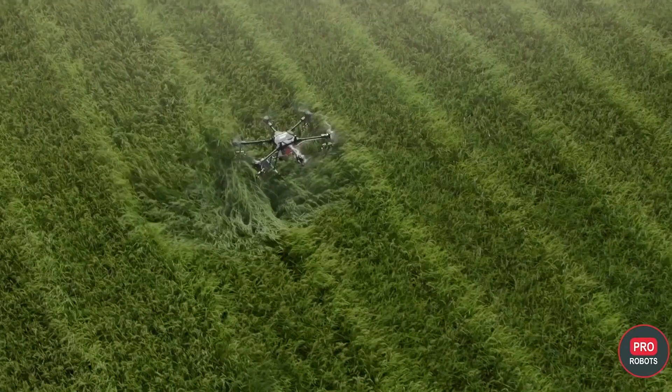There are now manifold applications for drones, and new ones are being added every day. The list of possible applications, whether it be agricultural, civil defense, energy, construction, real estate, logistics, media production, or security tasks, as you can see, it's long. The use of drone technology will continue to expand due to its wide range of possible applications.

That's the simple reason why farmers in particular are so keen on the use of drones for their work. From a bird's eye view, you can see many things better than from the ground.

Multicopters and drones can be used in a variety of ways in agriculture, forestry, and viticulture. Precision farming is the key word. Multispectral cameras and color filters can be used to determine the health of crops.

These filters allow only certain color ranges, called multispectral, or only individual wavelengths, called hyperspectral, of the leaf reflection to pass. Using GPS-based flight plans, several hectares can be flown over autonomously within just a few minutes.

These results enable precise management, which can either target or save resources such as water, fertilizer, and pesticides.

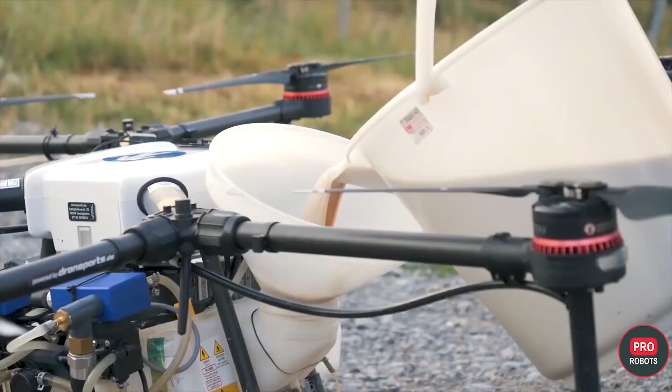One application is vineyards, which are usually difficult to reach. For example, a winemaker can take targeted and early action on the vineyard without losing harvest or having to treat an entire vineyard. Another possible effect is that soil pollution decreases because the soils are protected.

Since no soil compaction is caused by heavy equipment, another positive effect, not to be neglected, is that there are fewer emissions due to the low flight altitude and efficient spray procedure. All of this leads to economical farming.

More and more authorities and organizations in the rescue and safety sector rely on the use of drones. With specially equipped thermal imaging cameras, they are actively helping to fight fires and conduct search and rescue operations from the air.

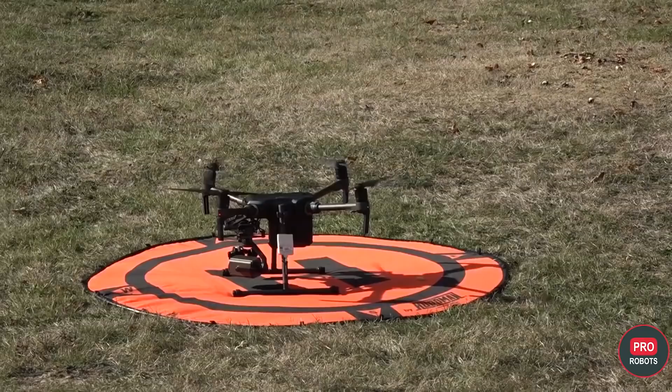Drones already offer a wide range of applications in civil protection as well, including the acquisition of aerial images in an operational situation, the use of infrared imaging cameras or special measuring devices, the transportation of equipment, medicine, or other aid, as well as the extension of radio links and documentation.

As technology advances, more and more operational areas are conceivable for drones that can contribute to saving human lives as well as significant material assets.

Today, unmanned aerial systems are already being used successfully in areas like search and rescue operations in mountain areas, for people in inaccessible terrain who previously had to be searched for on foot by mountain rescuers for hours.

They can now be located in as little as 10 to 20 minutes with the use of aerial operations.

Drones can be useful to law enforcement as well, especially during emergencies, and cities across the US have found creative ways to use these drones.

At present, drones are used for a variety of reasons, ranging from hostage negotiations to bomb investigations, criminal surveillance, and crime scene analysis.

In the present coronavirus pandemic, some countries' police agencies are using drones to check in on residents who have tested positive for COVID-19. In India, police are using drones to track large gatherings and monitor narrow roads that police cars can't normally fit into.

In France, health warnings are blared through drones flying over deserted beaches.

However, fire departments are also calling for drones to be used as firefighting tools, with the ability to transport heavy loads. The possibility of transporting rescue workers on or in a drone is also being examined.

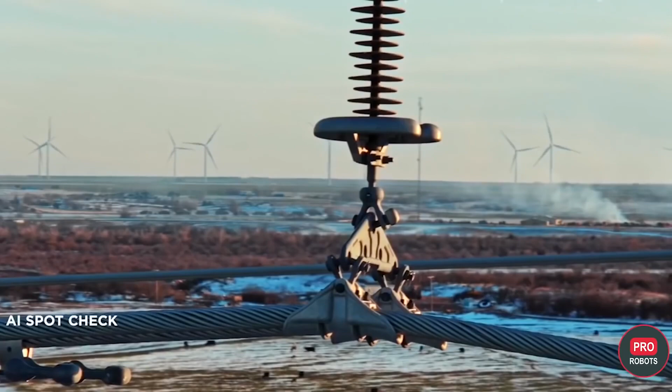A major application for aerial robots is maintenance. In both reactive maintenance, which has become rare, and preventative and predictive maintenance, drones help provide accurate data which can support condition monitoring, speed up repair processes, and minimize downtime.

Drones are helping engineering teams inspect and maintain wind and solar farms. Through machine learning, drones can autonomously recognize patterns and regularities via cameras and sensors.

Based on these findings, valuable recommendations for action can be provided, for example, which are only made possible by the drone's different perspective. But not only automatic surveillance can be supported by a drone.

From the air, the condition of wind turbines, satellite dishes, or the location of containers in the cargo port can be checked. Aerial reconnaissance by flying objects can save a lot of time for employees, who instead of looking themselves can let the drone fly and have the data images right away.

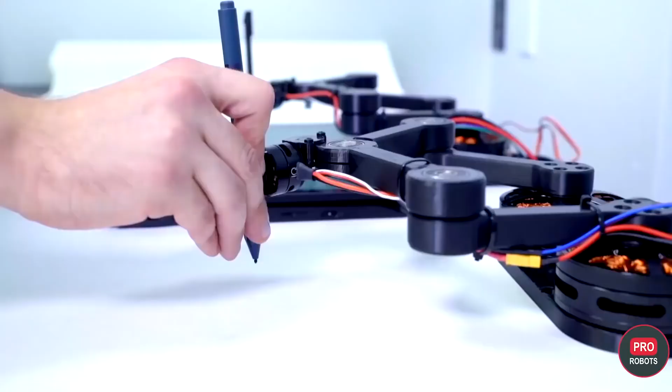Open-air rooftop systems that are difficult to access can then be monitored from the air. To ensure the best drones can withstand the rigors of industrial use, the appropriate components must be in place, however.

IQ technology allows users to gather important motor data and telemetry for preventative maintenance. Imagine being unable to monitor the health of your vehicle, like a car without a check engine light. In the drone market, motor and control technology is still hobby grade, and existing solutions don't provide easy access to motor data. Hence, IQ Motion Control built a motor controller that can report both standard and advanced telemetry.

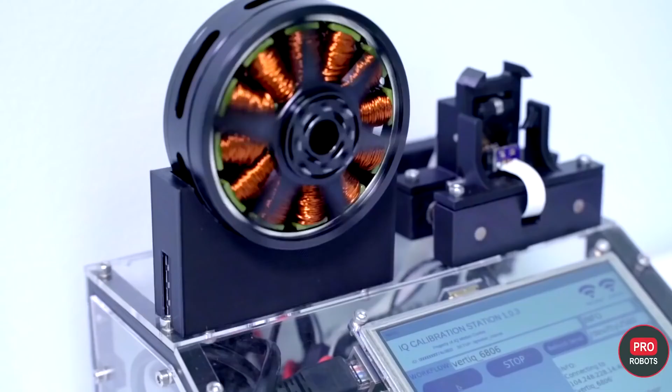Drone makers will be able to significantly improve maneuverability of their vehicle. With IQ's closed-loop motor control technology, IQ components users observe better efficiency, improved power and torque, improved cornering and handling, and can stabilize and brake up to 4 times faster. IQ Motion Control software further enhances motor performance, and the IQ Motion Controller also reports a wide range of motor parameters that can be used for preventative maintenance.

With IQ's high torque and high performance UAVs and robotics devices, users will be able to exercise precise, smooth control over these compact, lightweight motor modules, enabling robotic arms, legs, and much more. Reliability is a big deal on any robotics device. The combination of IQ's high-end motor performance and extensive feedback allows drone makers to build the most reliable vehicle for any purpose.

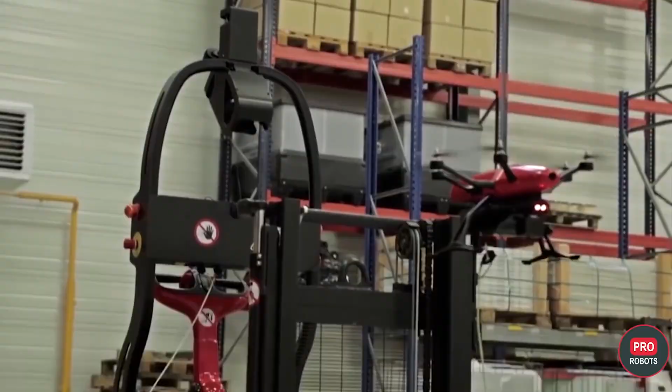In the future, drones are expected to be increasingly used for internal and external goods transportation. Due to their agile flight characteristics, drones can easily fly not only outside but also inside buildings. In intralogistics, they are used in warehouses or high bay warehouses for many kinds of inventory control, performing tasks such as inventory autonomously and under software control. Until now, this has required many employees during normal operating hours.

But with a quadcopter, this can be done at night and without any personnel, especially in high bay warehouses. This reduces the risk of accidents for employees, and permanent monitoring of stock levels also improves inventory accuracy throughout the year. To ensure power supply and location in the hall, the drone is coupled with an automatic high-lift truck.

Another example are doks. innovation from Germany offers a complete solution for automated inventory and inventory management in pallet racks in the warehouse area. The solution enables precise location and fully automated recording of the entire warehouse.

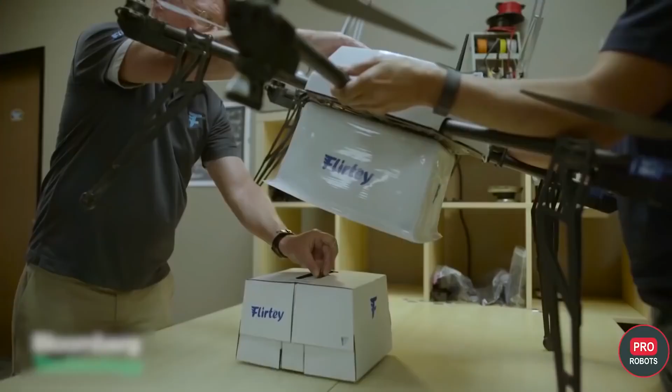Receiving and sending packages by a delivery drone was made possible thanks to a specially developed packing station on which the drone could land. Reps for DHL say it's the first parcel service provider in the world to succeed in integrating a parcel copter directly into its logistics process.

A trailer detection and port inspection solution is also possible with drones. By performing digital inspections at the port, operators get better, simpler, faster, and well-documented data that supports their reporting and further business development. Smart mapping of port infrastructure and harbors helps simplify daily operations such as terrain management. In addition, modern 3D maps allow volume inspections of drone equipment to not only detect but also capture the volume of stored goods and materials on the quays, such as sand, gravel piles, etc., all from the air.

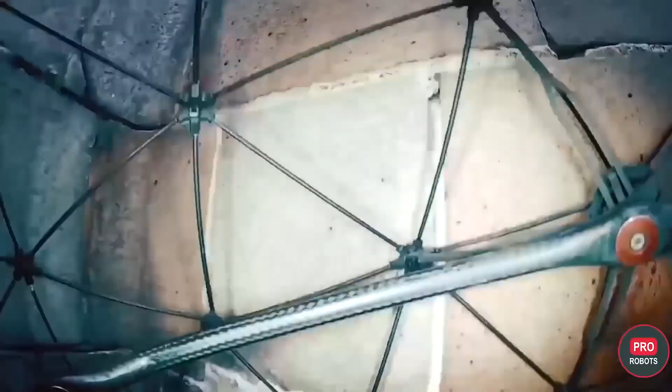The use on plants and in the chemical industry requires the highest concentration and does not allow any errors. One of the most important applications is the inspection of high flares.

Drones can also be put to wonderful use in technical maintenance, particularly in areas of large plants that are difficult to access or located at high altitudes, and can be monitored cost-effectively in this way. According to drone manufacturer Multi-Rotor, energy suppliers and plant engineers are already relying on these flying detectives.

The Italian company Alv Group uses the Aibot X6 drone to obtain high-precision data for bridge inspections. This allows more than 4,000 structures to be surveyed, inspected, and maintained each year.

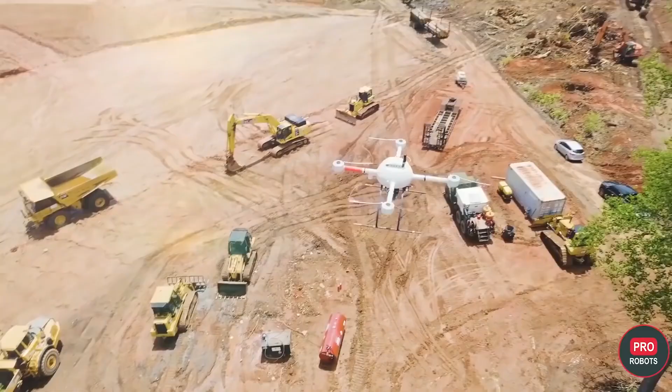Another possible use of drones is the mapping of land and geography work. The Micro Drones MD Mapper 1000DG system is a fully integrated aerial photogrammetry and mapping solution. Featuring the Applanix APX-15, the system allows surveyors to achieve professional results with fewer or no ground control points. Micro Drones offers a complete package consisting of the drone, sensors, hardware, software, workflow, training, and support.

In this video, you'll see the system in action. Topography data is captured efficiently on-site to produce helpful models for decision-making.

Entertainment drones are also used for entertainment purposes. For example, more than 1,300 drones simultaneously flew into the night sky over the Chinese city of Xi'an. They made a 13-minute light show and entered the Guinness Book of World Records. Enjoy this magnificent show.

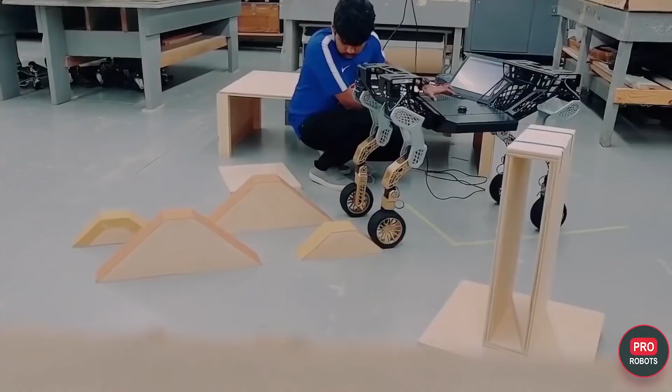Hyundai unveiled its new Tiger robot transformer. The fully autonomous modular robot can move on wheels, staggered feet, and work in conjunction with an autonomous drone. Tiger is supposed to be a mobile scientific platform. Tiger's leg and wheel system provides a full 360 degrees of directional control as well as all-wheel drive.

If the robot encounters any extreme terrain, it can use its walking ability to overcome obstacles and carry its supplies to its destination. The body of the robot is printed on a 3D printer, and each leg with 6 degrees of freedom consists of 3 segments and a wheel. The company plans to commercialize this robot within 5 years, but it's not yet clear where exactly such a complex and probably expensive system will be in demand.

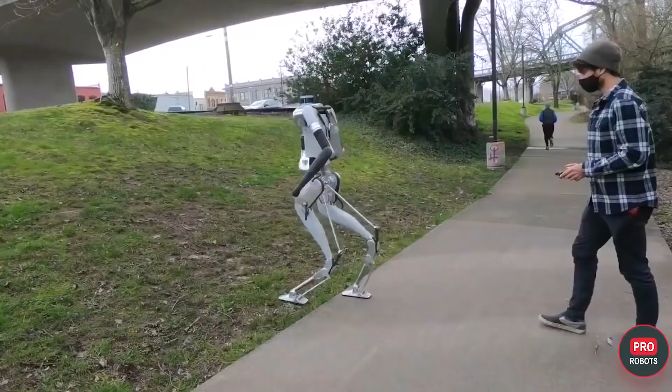Agility Robotics has shown the ability for its commercial humanoid robot Digit to move around on damp, hilly grounds in the forest. Extended autonomous ability allowed Digit to perform simple tasks with little to no additional programming. Digit can navigate stairs, obstacles, and a variety of landscapes.

NASA has tasked the SpaceX team to deliver the first components of the future Lunar Orbiting Station Gateway to the Moon's orbit. The Falcon Heavy rocket will carry the station's main section, which includes the living module and propulsion element. The launch is tentatively scheduled for May of 2024. The finished station will be comparable in size to the ISS and will be able to change orbit to perform various tasks and evade dangerous objects. It will also be an assembly point for ships going to Mars and beyond.

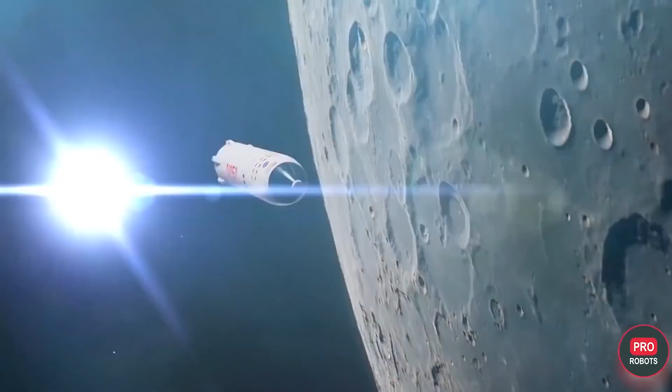DARPA has announced the beginning of a new program called NOM-4D. The purpose of this program will be to build large objects in orbit and on the Moon. The idea is to place all the production and assembly of objects in orbit around Earth.

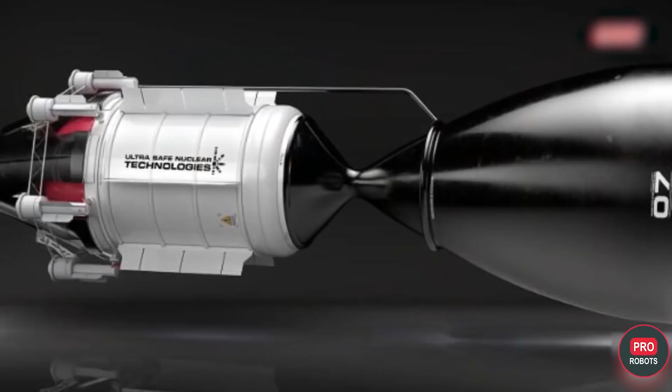Ultra-Safe Nuclear Technologies has proposed developing a nuclear engine for NASA for human missions to Mars, due to take place in 2035. Such a solution could reduce the flight length by 55 million kilometers, down to 3 months from 7 to 8 months. It would reduce the cost of the flight and the time exposure to cosmic radiation on the human body. But to use a nuclear engine in space, you need to find uranium fuel that can withstand the high temperatures inside the engine.

USNC Tech assures that it has developed silicon carbide-based fuel that can operate at even 4,400 degrees Celsius. But how do you protect the ship's crew members from this radiation? According to Michael Eads, the liquid fuel stored between the engine and the living segment of the ship should block radioactive particles as well. Future colonists of Mars should simply stay away, or as far away from the reactor as possible.

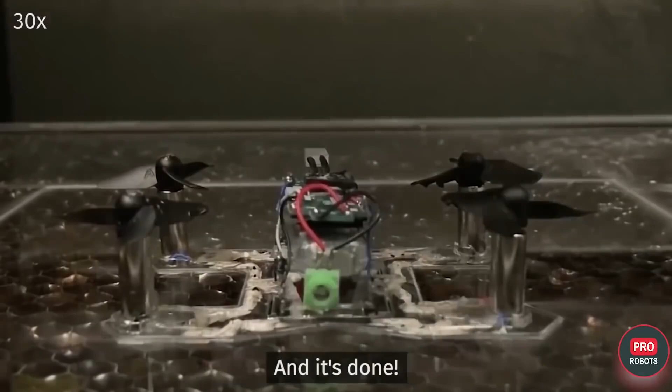Developers from the United States and Great Britain have created a laser cutter attachment that allows them to create flight-ready drones. The drone itself is cut out of the hull, and the attachment moves components into it, applies contact tracks, and sinters them. The drone can then take off immediately and get to work. The process requires no human intervention, except for the interaction of the software. The nozzle itself contains 2 syringes connected to one common pump. One acts as a pneumatic gripper to move the components, and the other releases a paste with silver particles. The laser then heats the paste and sinters it into a solid track that is well conductive. In the same way, the nozzle clamps the components to the body parts.

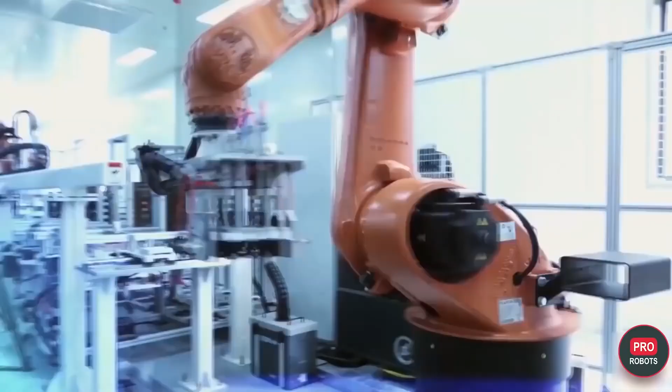The Neolix factory, located in Changzhou, China, will produce 10,000 level-4 autonomy robots each year, according to drone.com. Neolix has already received about $46 million in investments to produce last-mile delivery drones, which can also be used as mobile vending machines.

In April 2020, the company reported a 10-fold increase in orders for robotic delivery trucks because of the coronavirus, with orders coming not only from China but also the Arab Emirates. Electric drones have a range of up to 100 kilometers on a single charge and can reach speeds of up to 50 kilometers per hour, although their actual operating speed is much lower to avoid accidentally running over passersby.

DARPA contracted General Atomics, Lockheed Martin, and Northrop Grumman to develop Long Shot military intermediary drones. The drone is designed to deliver air-to-air missiles from manned fighters or bombers to an enemy target through contested airspace, increasing attack distance and effectiveness while minimizing risk to human pilots. Concepts suggest the vehicles will have retractable wings, stealth capabilities, and room for 2 to 4 missiles.

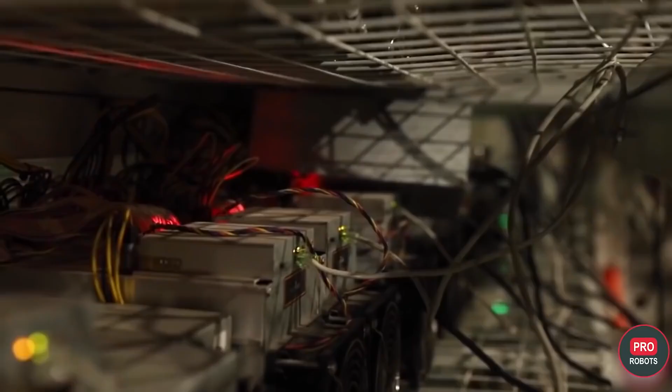German police failed to seize $66 million in cryptocurrency from a criminal. A German citizen had gotten rich in bitcoin through hidden mining on other people's computers. During his arrest, police confiscated an electronic medium storing the cryptocurrency wallet software, but without the password it's impossible to seize the illegal income, and the arrestee claimed he had forgotten it. Although police say they did everything to prevent him from using the loot, most likely by destroying the flash drive or hard drive with the wallet program inside, if the criminal has a copy of the wallet, he'll be able to use it in 2 years when released.

By the way, now in 2021, MasterCard will accept payments in some cryptocurrencies. The company stated it's preparing for the future. However, the payment system does not plan to support all existing cryptocurrencies and intends to use stablecoins, which are backed by real assets.

A new round of struggle between deepfake creators and the systems that recognize them ended in victory for the video counterfeiting algorithms. The new neural network easily fools any deepfake detector by simply embedding a special adversarial example into the frame of the video. The effect is truly disconcerting: even a hastily concocted deepfake is detected by the detector as a real recording.

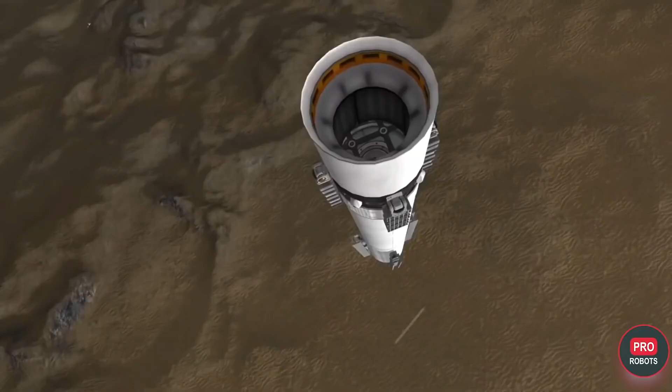Russian Roscosmos has patented a device for landing the return stage of the future Amur launch vehicle. A mesh structure made of heat-resistant steel and a mechanical manipulator will be installed on the ground. The return stage of the rocket will descend along a calculated trajectory set by the control system to the base of the structure, with its tail compartment sliding along the inner surface of the mesh structure. To make the landing precise, developers used a mechanical manipulator capable of gripping the spent stage.

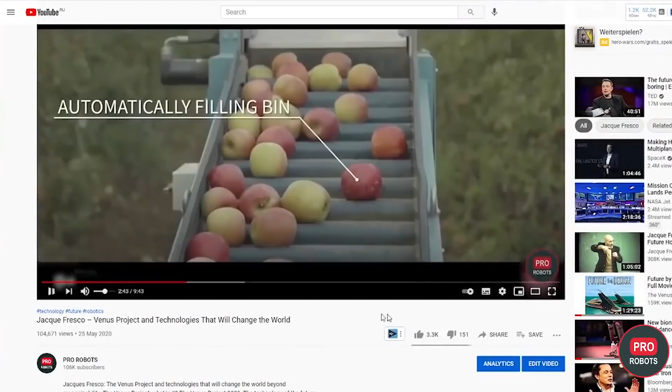The project of a bright technological future is described in detail in the video linked in the hint. In short, founder Jacques Fresco considered the only right way for mankind to develop is one in which all the boring, dangerous, and monotonous work is done by robots and advanced artificial intelligence. People live in smart cities—completely self-sufficient automated systems that take into account not only their own needs but also the needs of the planet. There's free access to everything needed: education, medicine, fully roboticized farms and industries, and city systems controlled by artificial intelligence that ensure there's enough for everyone.

The idea is terrific, but many people still have questions. For example, what's the difference between the Venus Project and communism or socialism? Jacques Fresco felt the transition to a new organization of life on the planet would not be revolutionary, but evolutionary. The probable cause of change would be a global crisis, as robotization would take away jobs from large numbers of people. They would lose purchasing power, and anything produced by large companies and corporations would remain unclaimed.

Thus, according to Fresco, humanity must realize that the consumer economy, like the monetary system, is obsolete. We can either fall into a protracted economic depression, or we can prepare for that time and transition to a resource-based economy in which science and technology ensure the rational use of resources for the benefit of all humanity and nature.

The transition to this economic model is systematic, replacing old cities with new ones, backed up by experiments and testing of hypotheses for the best design of these self-sufficient, highly automated cities. The very construction of these new cities and the disposal of obsolete ones is also being automated, which in the long run will also not require human participation.

The next question for the Venus Project concerns the details of artificial intelligence. After all, in order to know people's needs and control appropriate and sufficient production, a system of sensors must be implemented everywhere, from agricultural fields to health sensors on our bodies sending information about medicines we need to robotic pharmacies. What if AI, knowing this much about us, decided to make us the slaves?

Jacques Fresco's answer to this question is disconcertingly simple. It's not the technology we should fear, which simply cannot be malicious. It's only the people who control the technology that we should fear. This was why he was against politicians and people in power.

For the rest, Fresco, as a social engineer, argued that if one person were placed in a favorable environment, it would form a new system of values. We'll talk more about this and how to achieve it later.

A common complaint about the project is the assumption that it is designed only for the so-called golden billion. On the official website of the project, it's repeatedly emphasized that its goal is to multiply the spiritual and intellectual potential of all people. The resources on Earth are declared the common heritage of all mankind, and if used rationally, there are more than enough.

In addition, the project does not offer everyone to build a palace and get an electric racing car. Fresco was convinced that with the availability of everything necessary, human values would change. Ownership of property would cease to have meaning or purpose.

For example, why would you want to maintain your car when you can call a robotaxi that will take you anywhere and drive itself to the parking lot? Or, if you're on vacation in the mountains, you don't need to take a drone to take aerial photos of the best moments. You can borrow it and then return it to the distribution center when you no longer need it. Having constant access to every resource is more profitable than constantly trying to buy or appropriate it all.

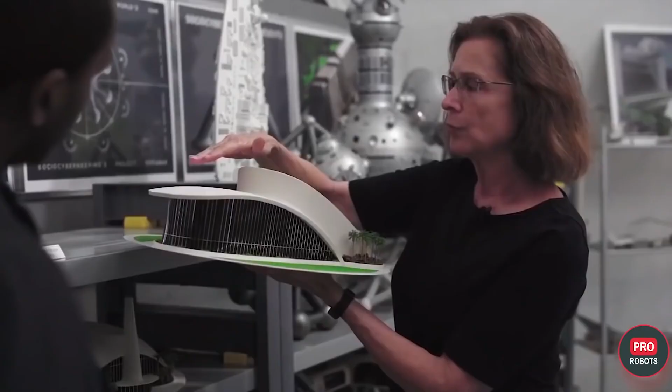Today, Jacques Fresco's like-minded communities are systemizing and popularizing his writings in order to generate sufficient demand in society for this direction. It doesn't sound as grandiose as if they were already building a city of the future somewhere, does it? But it all rests on financing and the support of states and large foundations.

The next planned step is to build a resource management center to work on developing systems and be a step toward future cities. The hope that such a project, which would overturn the whole current system, could be implemented by a small group of people without proper funding seems ridiculous.

We can sit and wait for a brighter future, but unfortunately it will not come on its own. Only by developing ideas, telling about them to as many people as possible, will you ever get results. A wonderful new world will have to be built gradually, and it will require enthusiasm and energy of talented engineers, people of science, and the broad masses who support the ideas of the project.

To build even one self-sufficient city, it is necessary to open research institutes and create prototypes of such city systems. Only after this preparatory work will it be possible to create a real city of the future. Not without reason did Fresco always talk about a guided evolution, guided by our will that moves consciousness, science, and technology in the right direction, and by the will of billions of people.

As for accusations of the project being a utopia, Fresco himself did not think so. According to him, these proposals are far from perfect, but significantly better than what we have now. He believed that a society is always in transition, constantly choosing which direction to take, so why not choose one that addresses the causes of our major problems?

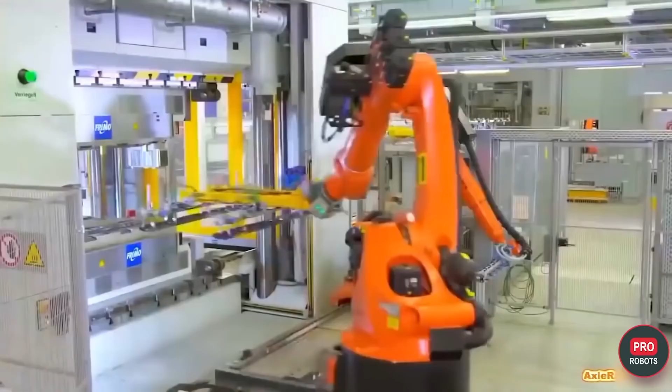Although today's statistics say that robots displacing some professions create other jobs, there's no guarantee that this will always be the case. While you may not be directly affected by this now, there are billions of people in the world below the poverty line. The richest 2% own most of the wealth and consequently the resources. This state of affairs will inevitably lead to wars, resource scarcity, hunger, and pollution.

There's also no telling where the creation of advanced artificial intelligence will lead, looking for advantages only for a certain group of people or the state. We see a great deal of enthusiasm in the military for AI, and this is a higher priority than sponsoring the development of its peaceful applications for the benefit of all people and nature.

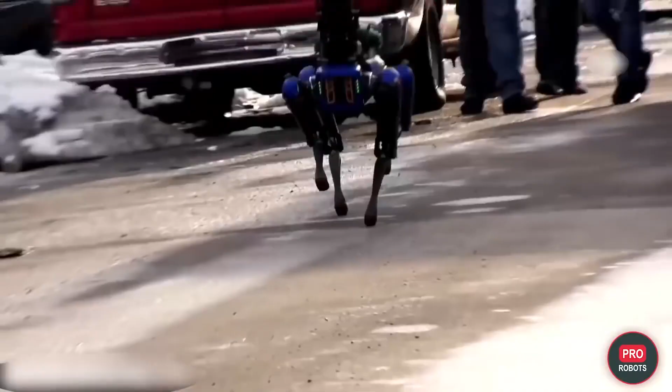The New York City Police Department used its Spot robot from Boston Dynamics, nicknamed DigiDog. The robot dog helped police inspect a home where robbers and hostages were suspected to be, streaming video from its camera as it ran into the house, climbed up to the right floor, and explored the area. Although there were no criminals in the house, the robot's help was appreciated by police, though witnesses in the area were a bit frightened by the robot dog.

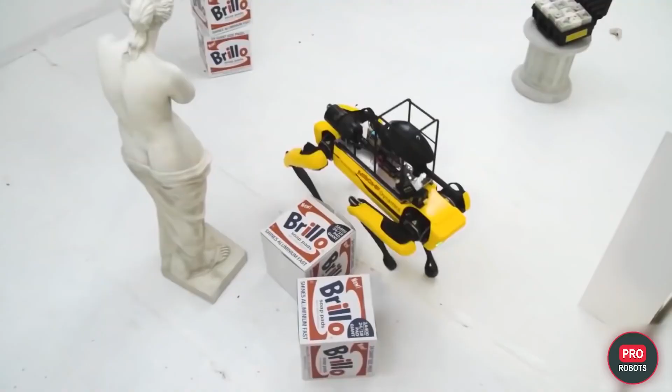An open provocation with an armed robot Spot was staged by MSCHF art pranksters. Project Spot's Rampage consisted of locking the robot, with a paintball gun on its back, into an art gallery with several famous modern works of art. The organizers then invited everyone to control the robot via the internet for 2 minutes, testing Spot's ability to get around obstacles and damage surrounding objects by shooting them with the gun. Boston Dynamics was outraged by the experiment and even offered the pranksters 2 more robots for their experiments in exchange for removing the toy weapon from Spot, but they refused.

The Toyota Research Institute recently showed their laboratory simulating a room in an ordinary apartment building. It became the testing ground for further research on Toyota's home robots, which we told you about in the video at the link in the description.

Ghost Robotics continued to promote its V60 robots for work at checkpoints as well as military bases. The cheap and reliable robot dogs are supposed to get around the perimeter, but can also be used armed in the future to deal with intruders. The company also showed new tests of the robot's capabilities on hills of loose rock and dirt.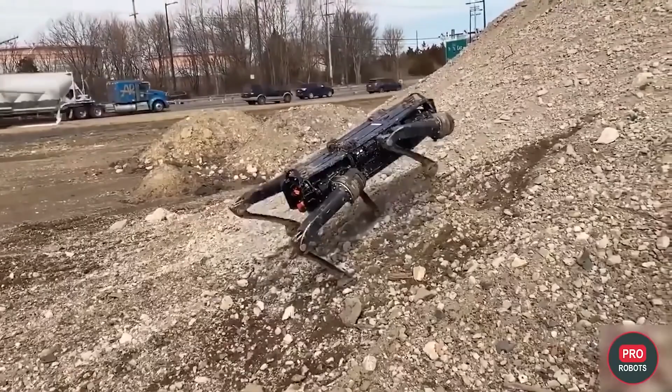Innovative engineering company Infocom Ltd. unveiled a new concept for its Tima robot for exploring the nearest planets in the solar system. The new Tima robot, with a swivel leg, will be able to quickly ride on wheels and climb rough terrain on improvised feet.

DJI unveiled a first-person view flight system. It includes a drone, goggles, and a controller. The drone weighs in at only 800 grams.

Its front camera records in 4K at 60 frames per second. The camera's pivoting suspension is stabilized electronically. Video is streamed to the goggles in real time with minimal delay, and it's written on a micro SD card, which is provided for the drone.

Acceleration from hover to 100 km per hour is claimed to be at 2 seconds, with flight time of up to 20 minutes and a range of 10 kilometers. There's a total of 3 flight modes available in this new drone: normal, sport, and manual.

Normal mode is a lot of fun and at the same time safe and affordable for beginners. The speed of the drone in normal mode is reduced to 50 km per hour. If the sensors of the device think you're going to crash into something, it will be reduced even further. When any unclear situation presents itself, you can simply release the control knobs and the drone will stop and hover in place.

In sport mode, there's an increase of speed up to 97 km per hour. Avoiding obstacles no longer slows down the drone, although the system will give you a serious warning in case of a dangerous collision.

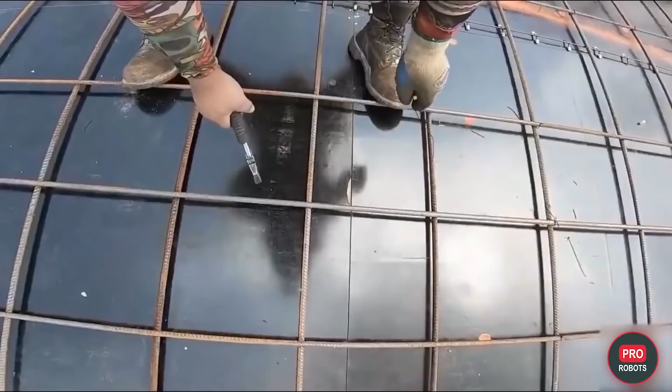Engineers used a quadcopter with large landing legs and an attached movable platform with a gun to bind the rebar to its bottom. The company claims that the drone speeds up the binding process by at least 2.5 times and also makes it 32% cheaper. But it did not specify exactly how it got to these calculations.

The Department of Applied Mechanics at the Technical University of Munich showed off its latest advances of its Lola robotics platform. The robot, without cameras or sensors to get preliminary information about the terrain, was still able to traverse uneven surfaces. Lola is an electronically powered humanoid with 26 distributed joints, with a total weight of 68 kilograms and 176 centimeters tall.

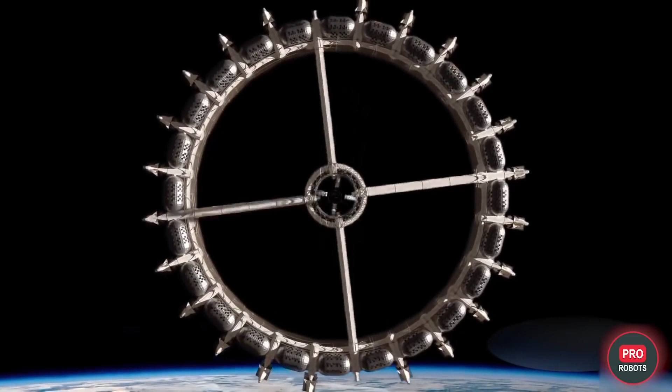Orbital Assembly Corporation's Voyager Station project, which is the world's first space hotel on low Earth orbit, could become a reality by just 2027. With construction beginning as early as 2025, the design of the hotel will include a restaurant, a cinema, a spa, and holds a capacity of 400 people.

There are 2 new generation Russian rehabilitation medical exoskeletons, the Exo-Atlet 2 and the Bambini. Recently, the Exo-Atlet was able to receive registration approval from Russia.

The Exo-Atlet 2 implements the main function of biofeedback, which is carried out through the initiation of movements. The device also allows you to adjust the degree of assistance to the person. A separate built-in myostimulation unit is synchronized with walking that stimulates exactly the same muscles that would be used by a real person when they walk.

The children's exoskeleton Bambini is actually the world's first child exoskeleton that solves the problem of restoring children with cerebral palsy, improving their quality of life, walking, and as a consequence, their cognitive functions.

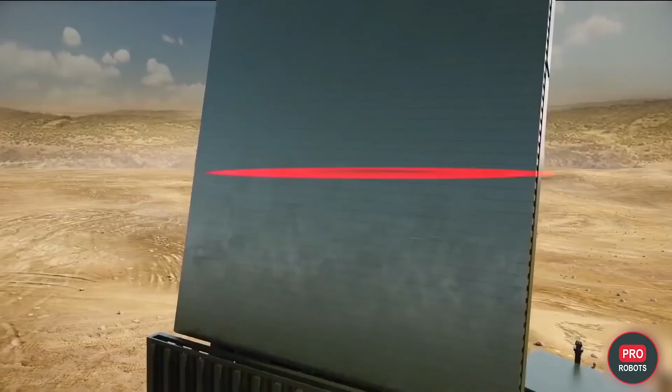The radar allows the drone to quickly locate enemy air defense systems by their emissions. The Harpy cannot be jammed by electronic warfare, and it is quite difficult to target for air defense, as the composite hull does not allow it to be detected at long ranges.

Second, even kamikaze drones can be reusable. For example, the Harop, which was a further development of the Harpy drone concept. Using a visual target classification system borrowed from the Spike missile, these kamikaze drones can detect targets visually without using their radar and identify target types by comparing pictures to a three-dimensional library. This allows the drones to be fully autonomous.

The operator can literally only specify the square of the target search, after which the drone will automatically leave the launcher and fly to the specified square to look for its targets. If no targets are found, the drone will return to the square specified by the operator and land by parachute. Then it can be used again and again after refueling. This is fundamentally different from earlier versions of kamikaze drones, for which each flight was their last.

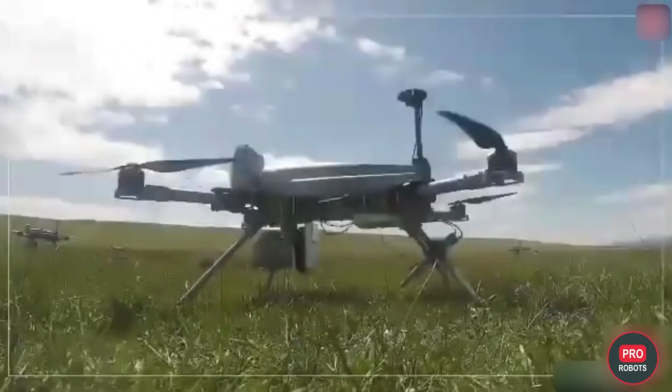Third, drones have learned to operate in swarms, which multiplies their value, capabilities, and destructive power. Swarmed drones are capable of conducting coordinated attacks with minimal operator involvement. Takeoff, formation and formation holding, route keeping, return to base, and landing are accomplished autonomously. However, some drones are capable of selecting and engaging targets independently, alone or in coordination with other group members. Swarms are not necessarily homogeneous. A heterogeneous swarm includes different types of vehicles with different weapons on board.

Kamikaze drones are produced all over the world. They include the Turkish Kargu, which create decoys for enemy air defenses while carefully scanning the terrain, and the Chinese Zhuhai Ziyan's Blowfish A2, capable of speeds of up to 130 km per hour, carrying onboard 60mm mines as well as 40mm grenade launchers. By the way, the new generation A3 drone is capable of carrying several types of machine guns on board, and according to the manufacturer, there are many orders for these drones.

Russia is also interested in creating kamikaze drones. For example, the Kalashnikov concern is developing the KUB and Lancet, which are remotely controlled projectiles that explode when they reach their targets. According to the manufacturer, KUB is capable of reaching a speed of 130 km per hour, flying for half an hour, and hitting the target regardless of its stealth and terrain. Additionally, it is planned to equip the Marker combat robotic platform with kamikaze drones.

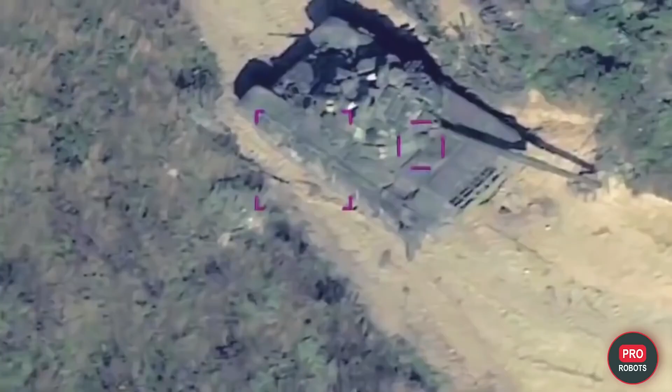Several types of smaller kamikaze drones, such as the Sky Striker, Harop, Orbiter 1K, and Orbiter 3 loitering munitions, have been used in Nagorno-Karabakh. Some are guided by air defense radar, while others rely on optical, infrared, and other sensors. The Orbiter 3, for example, can hover for 6 to 8 hours and weighs only 30 kilograms. The Sky Striker is heavier. Its warhead can be 10 kilograms, but the value of these drones is not in their power, but in their price. One Sky Striker drone can cost less than $1 million, according to Defense News.

At the same time, kamikaze drones are usually equipped with advanced navigation and targeting systems, capable of aiming and keeping their sights while maneuvering towards a target at speeds of up to 550 km per hour. In other words, such a drone is capable of destroying a modern tank or missile system worth much more than the cost of the drone itself.

To launch these swarming kamikaze drones, China demonstrated a multi-barrel launcher. The combat vehicle was created on the chassis of a 3-axle version of the Dongfeng Warrior armored vehicle.

Containers with UAVs are in special protected compartments that raise before use. In total, this system can engage 48 loitering munitions.

So why are kamikaze drones so dangerous? Although such vehicles are not currently classified as lethal autonomous systems, since they are supposed to involve an operator, it is virtually impossible to verify this. Technically, a loitering munition can be fully autonomous and perform a mission without the participation of the operator. So we can consider this to be a prototype of autonomous robotic killers.

But the main thing is that modern air defenses are designed for classic targets like planes, helicopters, or tactical missiles. They may not observe drones at all, especially if they fly low or they're seen too late. Additionally, the target system of the complex might not be designed for hitting such targets. Add to this the fact that the cost of an air defense projectile is hundreds or even thousands of times higher than that of a kamikaze drone.

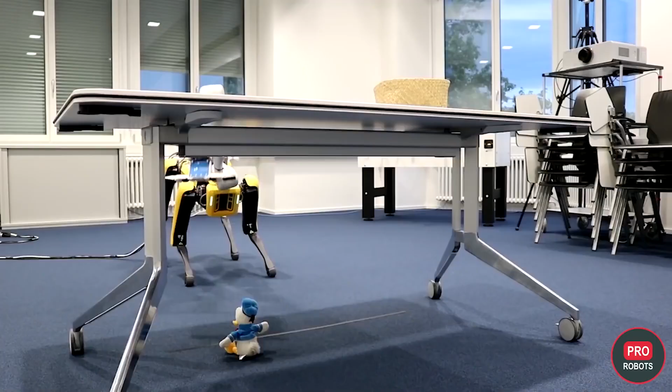Interestingly enough, Waymo took a different route than the Tesla and drove more cautiously. As a result, Waymo's robot cab took 8 minutes to drive, while the Tesla Model 3 took only 5 minutes and 12 seconds. Tesla Autopilot can be used on any roads in any city or country, but only under the control of a real driver.

Conversely, Waymo robotaxis so far work in limited areas but with an empty driver's seat. In the video of the experiment, you can see that Waymo robotaxi, unlike the Tesla, avoids more dangerous left turns at unregulated intersections. That's why the car took a longer but safer route for its trip.

In the end, both cars handled the route well, visualized the environment around them perfectly, and moved smoothly without sudden accelerations or brakes. Also, neither vehicle's autopilot systems violated traffic rules and responded to traffic signs effectively.

Tesla is building an energy storage system of at least 100 megawatts in Texas. This is Elon Musk's way of dealing with sudden power outages, one of which happened last month because of unprecedented snowfalls. Tesla has not yet publicized this project, but it will be conducted under the cover of a little-known division of Gambit Energy Storage LLC.

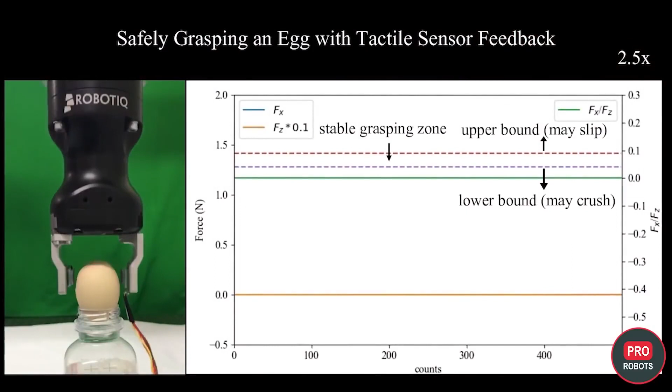A team of developers from China and the United States has developed magnetic finger pads for robots. It is no secret that the sense of touch is what allows us to interact with objects so well, and it's this same sense of touch that's so difficult to give to robots.

In this study, the role of sensitive fingertips is played by a thin, flexible magnetic film. Touch and pressure cause it to deform, and sensors located deeper within it record the resulting changes in the magnetic field. A neural network is used to analyze the signals from the sensors. It can determine not only the place and force of contact, but also feel the texture of the surface.

Chinese developers have introduced a soft robot for deep-sea research. The 22-centimeter long bot has a 28-centimeter fin span and is modeled after a deep-sea fish. To make it able to withstand water pressure, all electronics inside the soft polymer body are divided into separate modules. Small circuit boards are connected by flexible wires and sealed in silicone.

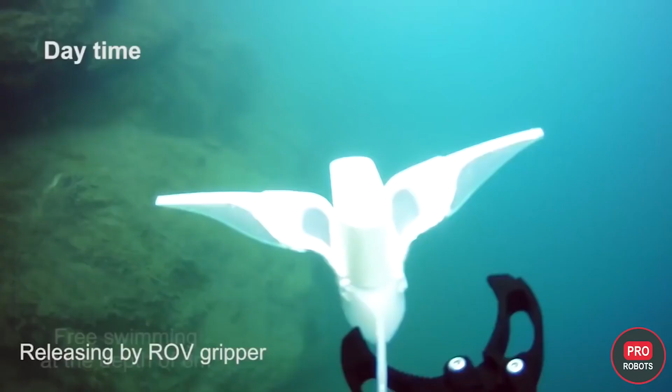Just like a fish, this robot moves by movement of fins made of an elastomer, which shrink when exposed to an electric current. Engineers tested the robot in 3 conditions: in a lake at a depth of around 70 to 80 meters, in the South China Sea at depths of 3,224 meters, and at the bottom of the Mariana Trench at a depth of 10,900 meters.

Although in the latter case we can see that the robot's actuators worked with a smaller amplitude, the device still retained its operability in extreme conditions.

Insects know how to navigate in a world with dynamic obstacles, wind gusts, and general uncertainty. MIT research team led by Kevin Yufeng Chen decided to endow flying robots with such qualities and developed a new generation of tiny, agile drones that look, act, and maneuver like real insects. The 0.6-gram device can maintain balance under external action, perform somersaults, and other complex maneuvers.

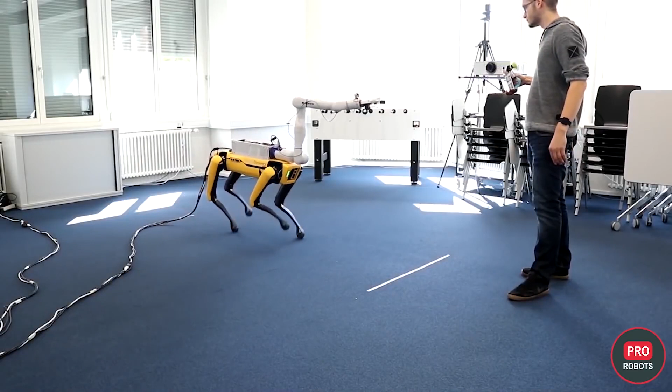Engineers at the Zurich University of Technology decided it's not necessary to buy a robotic arm for Spot from Boston Dynamics. It would be much more interesting to make it yourself, based on any available manipulator. A robot with a robotic arm can track objects and manipulate them with ease.

Robotic Systems Lab also decided to keep up with Boston Dynamics and created a robotic arm for its 4-legged robot, ANYmal. Engineers developed a full-body motion planning structure that combines dynamic movement with manipulation tasks. As a result, any task involving the manipulation of external objects can be solved on the robot's onboard computer in real time as part of a control scheme with model prediction.

Anybotics showed how the ANYmal robot can avoid dynamic obstacles and navigate autonomously in a challenging space. With high-level navigation commands, the robot can safely navigate to a target location based on depth camera data and reinforcement learning. The data, which includes images from the camera and its trajectory, is combined by the system and used to simulate environmental states.

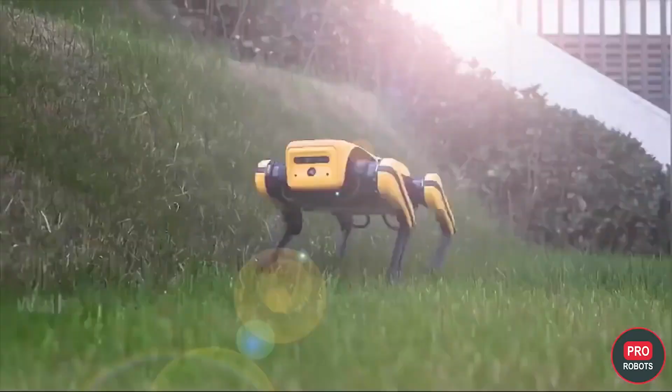Deep Robotics has published a new video of its Jueying Mini Lite robot. The robot does somersaults, possibly knowing how to avoid obstacles and follow a human. It's possible, because the company does not comment on the video, and there could be a human operator behind the scenes. In any case, the robot looks nimble and agile. It also looks a lot like the robot Spot.

After a successful performance in honor of the Chinese New Year, Unitree Robotics began to offer robots for mass performances. And by the way, an unpacking and review of such a robot recently appeared on our channel. The link is in the hint in the description of this video.

Robotic Systems Lab also showed its strongest robot ever in action, the Menzi Muck M545. This unmanned, semi-autonomous walking excavator assisted first responders in a simulated car crash with an explosion.

At last week's MWC Shanghai 2021, which focused on next-gen technology, Huawei said it has built more than half of the 140 commercial 5G networks currently deployed in 59 countries. And despite bans on its network equipment in many countries, it should be noted that most of the directors of the major technology companies who spoke at the event noted that the implementation of 5G networks in the coming years will determine the speed of technology development in all countries around the world.

Recently in China, deputies approved an ambitious plan for a technology breakthrough. According to the new plan, by 2035 the country must make significant breakthroughs in technology, from artificial intelligence to quantum computers and biotechnology. To do this, spending on basic research will increase by more than 7% every year for 5 years. This will help reduce the country's dependence on foreign technology markets, particularly the US market.

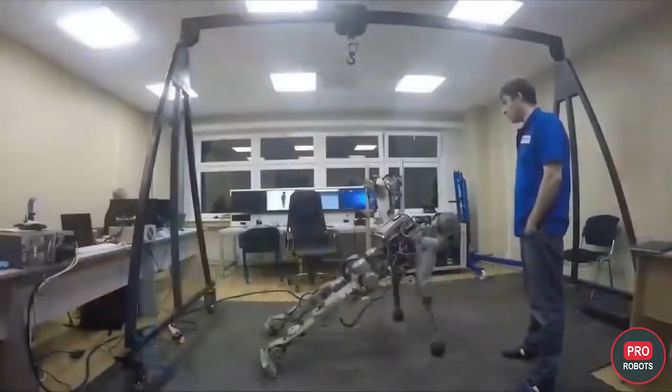Incredible new Chinese robot, police drone that breaks windows, news from Elon Musk, DARPA competition, and other high-tech news in this one issue.

If you've been watching our channel for a while, you'll remember that both Boston Dynamics and Anybotics have been trying hard to experiment with robot wheels as an option for moving quickly over simple terrain. But while those companies have considered installing either legs or wheels, the Chinese company Tencent has been able to checkmate this issue by combining both mobility options in one 4-legged robot.

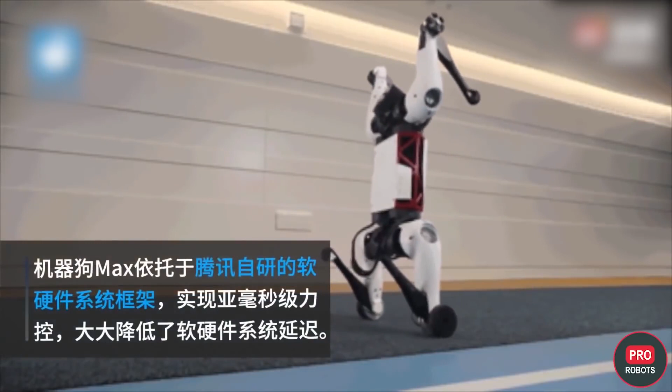The robot not only walks on 4 legs, but also rides on both 4 and 2 legs, and in the last case can also use its front limbs to grab objects. In other words, it's a 4-in-1 robot on legs and wheels, capable of acting as a 4-legged and 2-legged humanoid platform. By the way, the wheels mounted on the outside of the knee joints allow the robot to accelerate to up to 25 kilometers per hour. The robot is also able to do somersaults, get up from its back, and jump over obstacles.

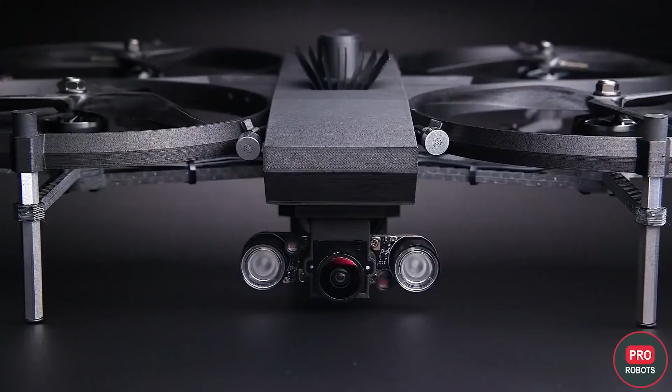BRINC introduced a mass-produced police drone capable of flying into buildings and breaking glass. The drone, with a carbon fiber frame and powerful rotors with propellers, has a flight control algorithm that allows it to push unlocked doors and fly through doorways. A camera, flashlight, ammunition, or glass window breaker can be mounted on the suspension for payload.

The glass breaker is a unit capable of spinning at up to 30,000 RPM, equipped with tips made of tungsten carbide. When the tip breaks the glass, the drone flies in. If it flips while doing so, a rollover mode is activated, returning the drone to its proper position. The drone can transmit video, sound, and communicate with the operator at a distance of up to 13 kilometers.

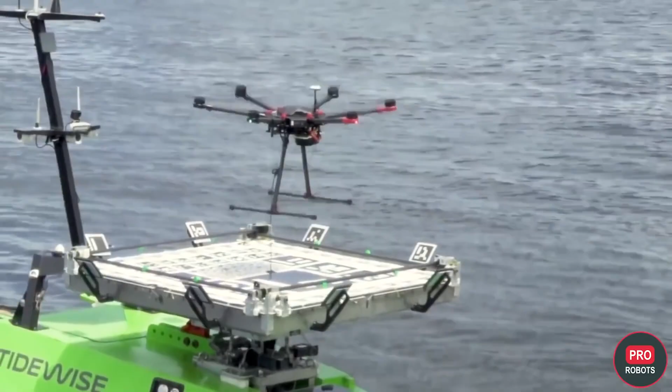Tidewise and Stable tested a drone and ship combination designed to search for oil spills at sea. The drone automatically takes off and lands on a stabilized landing platform on the vessel, which maintains a horizontal position at all times. The platform also serves as a docking station for the drone. Before landing, the drone and the ship communicate by radio, and during landing, the drone monitors codes on the platform with a camera and gently lands on it.

The Tesla Cybertruck will be able to power campers and small households. This was confirmed in a recent tweet by Elon Musk. According to fan calculations, if the electric car's battery is at least 100 kilowatt hours, the pickup at a price of $50,000 could be more profitable than any other devices, including the Tesla Powerwall. Musk previously wrote that such a feature could appear in all Tesla models. Hyundai also promised a similar option.

SpaceX has expanded its Starlink coverage to the United Kingdom, Germany, and the South Island of New Zealand. SpaceX now has 1,200 satellites in orbit, 310 of which were launched this year. Remember, the company plans to launch a total of nearly 12,000 satellites in orbit over the next 4 to 5 years.

DARPA has announced a competition for the creation of flying suits with a prize of $1.5 million. The reward will be given to companies able to create working prototypes of the device. The principle of work, as well as its form, is not important. Quick deployment, training, independence from external equipment, and intuitive operation are key elements, as well as the ability to set up production. In essence, this is as open a request as possible for any promising technology in compact individual aircraft. DARPA is casting a line into the water to see what comes out. By the way, we already did a review of existing flight suits in the video at the link in the tip.

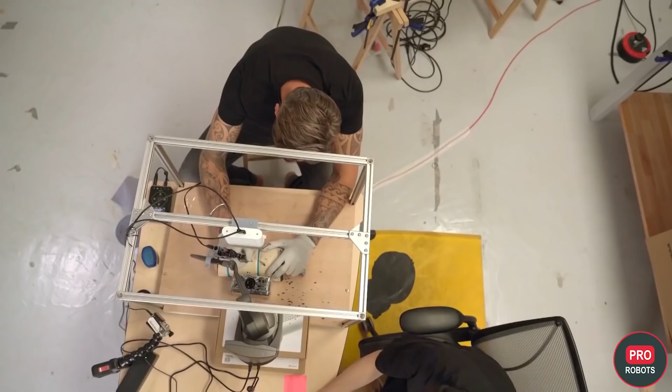As part of T-Mobile's advertising campaign in the Netherlands, designed to demonstrate the speed of big data processing by 5G technology, TV host Stijn Fransen got a tattoo from a robot. The 5G robot was remotely controlled by tattoo artist Wes Thomas. The robot used machine learning to recognize the position of Fransen's arm and correlate it with the actions of the tattoo artist, who was tattooing on a mock-up arm in another room. The experiment went well and no one was hurt.

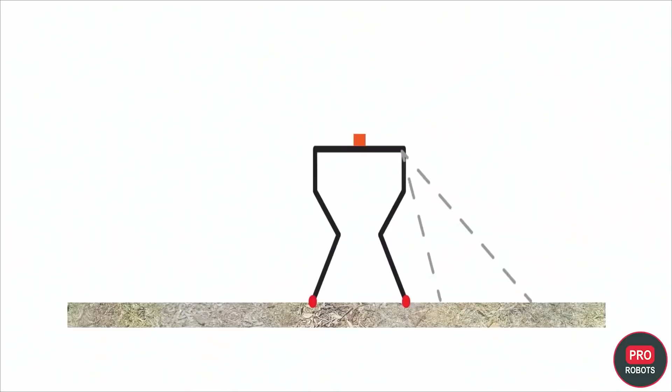Norwegian engineers have created a robot capable of adapting its body to its surroundings in order to get around better. The four-legged robot DyRET is able to adjust the length of its legs, analyzing results to better adapt to similar conditions the next time around. The robot uses cameras and sensors in its legs to analyze the surface. On difficult terrain, it shortens its legs for stability, and on easy terrain, it lengthens them to increase walking speed. The robot is not pre-programmed for surface types, but works on the principles of self-learning. This allows DyRET to not only work in unexpected and changing conditions, but also to adapt to breakdowns. For example, if a leg is damaged, the robot can shorten the rest and reach its destination.

The University of Michigan and Ford Motor Company have opened a $75 million state-of-the-art robotics research center. It brings together researchers from 23 buildings and 10 of the university's top programs. The first 3 floors of the Robotics Institute contain research labs for university robots to test humanoid and quadrupedal robots, robots for Mars, marine robots, and drones and other flying vehicles. The 4th floor is home to Ford's first robotics and mobility lab on campus, as well as 100 Ford researchers and engineers. Let's hope someday we'll have similar future technology research in our country too.

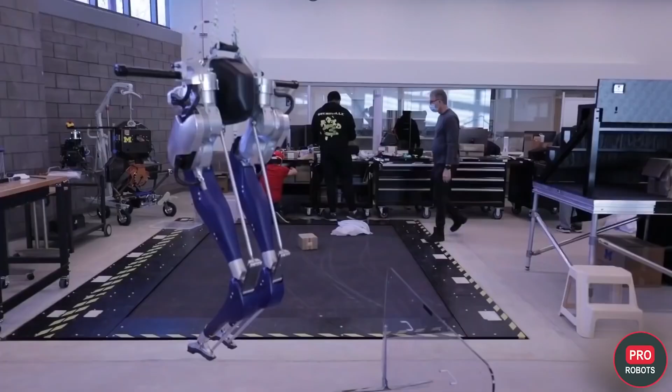NASA showed how it created robotic space refueling tools and tested them on the International Space Station. Robotic refueling gives NASA and the commercial satellite service industry the confidence that they can use robots to refuel, repair, and maintain satellites in both near and distant orbits, far beyond the reach of where humans can go today. The agency also plans to build a free-flying service spacecraft that could access, repair, and refuel satellites in geostationary Earth orbit.

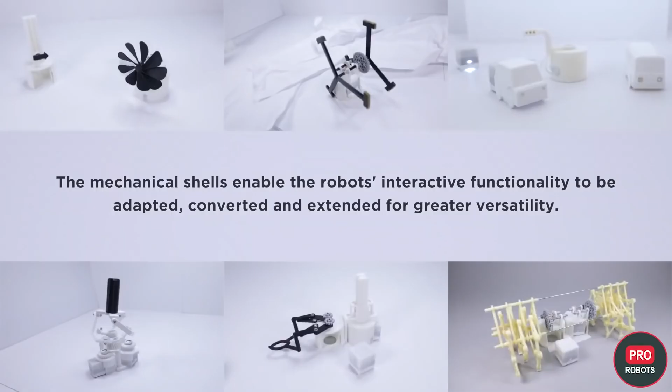HERMITS robot is a concept of a robot capable of switching between different narrow tasks by simply changing its body. In this way, a robot with a narrow specialty becomes versatile. HERMITS is based on small Sony Toio robots. They are two-wheeled robotic cubes that can localize based on infrared images and interact with each other and with other objects through a centralized controller. MIT has only made minor changes to Toio robots, adding a small servo motor that can push a mount out of the top of the robot so it can dock with any custom shell. Shells without any electronics inside can easily be printed on a 3D printer. In our opinion, this idea is close to genius and will definitely get its development.

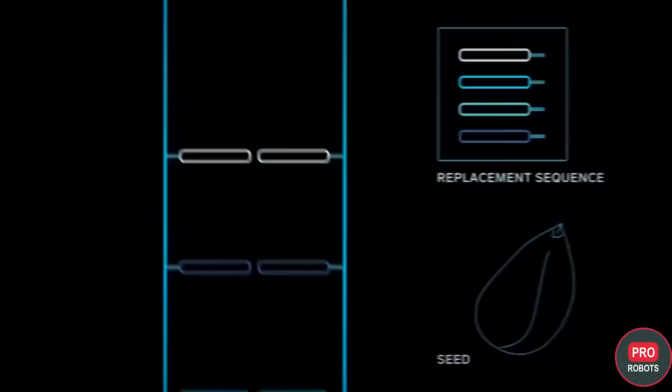But all of this is just narrow artificial intelligence, programming machines to autonomously meet specific needs with advanced computing, decision-making, neural networks, and deep learning. This is the current state of AI research. They help us achieve productivity, reduce costs, and improve quality.

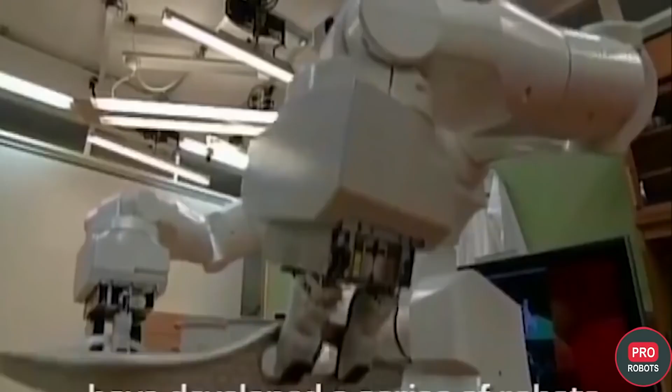The development of narrow AI, like robotics, is sparking discussions about the risk of unemployment. According to various estimates, in the next 10 years, robots will take 30 to 40% of the jobs currently held by humans. Researchers at the World Economic Forum say that by taking some 75 million jobs, new technologies, including artificial intelligence, will create more than 130 million new ones. After all, when the first machines appeared in factories, people were also worried about losing their jobs. But not only has progress not taken away jobs, it has also offloaded us.

Artificial intelligence will surely take over many of the routine tasks performed by humans. At the same time, new technologies, various new world problems, space discovery and colonization, global military, green energy, and so on will create many new jobs.

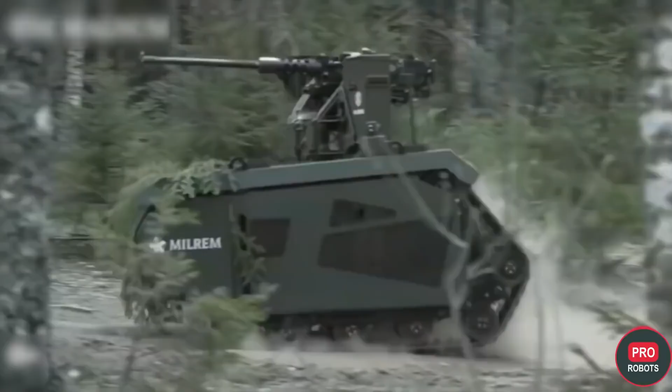Narrow AI depends on human programming. Even if we automate the software part of it, it will still be an area designed by humans for specific purposes. We can program Terminators to kill people or robot builders to build a base on the moon. Either way, we will get exactly what we wanted, because such artificial intelligence has no consciousness.

But as expected, the next stage in development of artificial intelligence technology will be general or conscious AI. Since no one knows today how it will be created, it will come in the next 20 to 50 years, but there is little doubt it will appear.

What will an artificial intelligence endowed with consciousness be like? No one really knows. Is there enough logic to call a machine conscious? And what about emotions, feelings, or creativity? Can consciousness exist without them? At this point, we just don't know.

Why are we afraid of conscious AI? Well, we fear the unknown. We call ourselves conscious, but we look at a world of endless political battles for power, conflict, wars over resources. We fear that artificial intelligence will be just like us. Moreover, a conscious AI might turn out quite different from us and decide that humans are a disease, a virus that has infected the Earth. Such an intelligence would be uncontrollable, looking at us without emotion, from its own point of view.

But this is not the worst of it. The third and final species is artificial superintelligence - AI with superhuman powers and abilities. This is the evolution of conscious artificial intelligence, which has learned everything available to cognition in this world. A superintelligent AI, enhanced by consciousness, will assimilate everything science or philosophy has to offer. It will reach the technological limits of knowledge, referred to as singularity. It may surpass the need for a physical body and travel beyond the known limits of physical space. It may sound bizarre now, but scientists believe this is possible in the coming decades, with only a short time likely to pass from the second to the third stage.

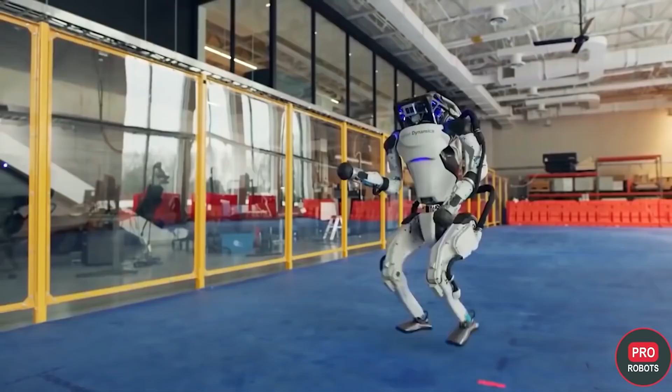But not all researchers agree with this point of view. Many believe our lives will be exceptionally better and that no dangers will threaten us. For example, Yann LeCun, the chief scientist in artificial intelligence at Facebook, once told the BBC that there will be no scenarios in the spirit of movies like Ex Machina or Terminator, because robots will not be designed with human desires. They will not feel hunger, thirst for power, the instinct of reproduction, or self-preservation.

But can we be so sure of this? Last year, Microsoft shut down its artificial intelligence-based chatbot Tay after Twitter users, who were supposed to make her smarter with casual conversation, instead taught her to respond with racist, misogynistic, and anti-Semitic slurs. The example is hilarious, but the situation is scary. By the way, if you want to learn more about that incident with AI, click the link in the description.

The third option is a merger. A proponent of this development is Elon Musk, as he sees it as the only chance for humanity - well, almost the only chance. Elon has Plan A, to create a chip capable of expanding our mental abilities to the level of advanced artificial intelligence, and Plan B, a colony on Mars, if Plan A fails. To quote Musk: 'We probably won't be able to surpass computer intelligence in the future, but we may be able to achieve a happy symbiosis.'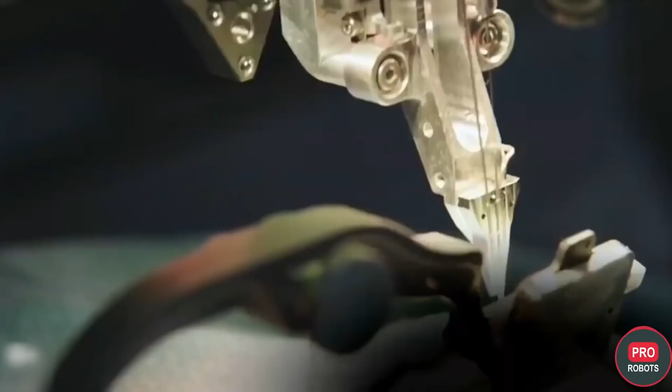And by the way, we will also be able to cure a lot of diseases caused by brain damage - congenital, accidental, acquired with age, or any other cases. So if someone has a stroke, epilepsy, seizures, clinical depression, or anything of the like, it can be cured with a brain device. The symbiosis itself, according to Musk, can be achieved with a neural lace, a mesh material that is injected and can literally connect to our brains to communicate directly with computers. This device is already being developed by his company, Neuralink. In the coming years, the chip will only help people suffering from paraplegia and lower limb paralysis, giving them, among other things, the ability to control their computer or phone with their thoughts.

Renowned futurologist Ray Kurzweil believes that just as the mammalian brain developed the neocortex 200 million years ago, which later enabled humans to invent language, science, art, and technology, by 2030 we will be cyborgs with nanobots the size of blood cells.

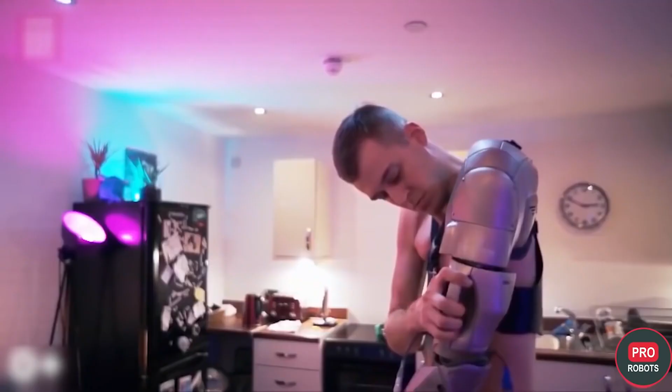They will connect us with synthetic neocortexes in the cloud, giving us the ability for virtual reality and augmented reality in our own nervous systems. We will become more interesting, more musical, and expand our wisdom, he says. The nanobots in our veins and arteries will treat our diseases, healing our bodies from within.

One way or another, all the engineers and scientists of today are convinced that the coming decades will be the era of artificial intelligence. It's believed AI will receive the greatest investment and penetrate all areas of our lives, changing them perhaps beyond recognition. This could be the greatest challenge for humanity. In the words of Elon Musk, the greatest filter of civilization - we're either going to get by with technology, or we will destroy ourselves.

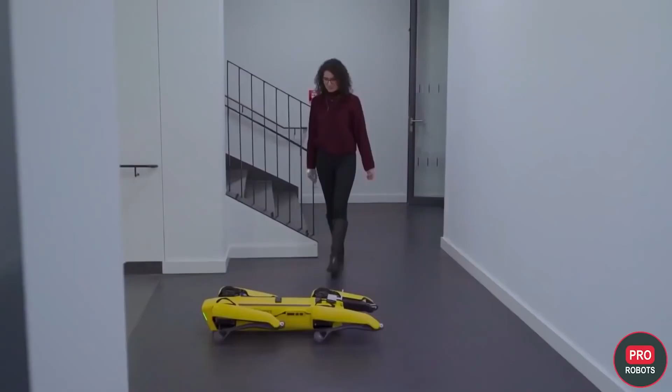Boston Dynamics unveiled a new robot, Stretch, designed to automate warehouse operations. The mobile platform, capable of moving in any direction and overcoming obstacles and ramps, features a mast and an arm. The mast with sensors provides enhanced sensing, fast and accurate detection of objects. The robotic arm has 7 degrees of freedom and is able to unload boxes or pallets directly from the truck due to its large reach.

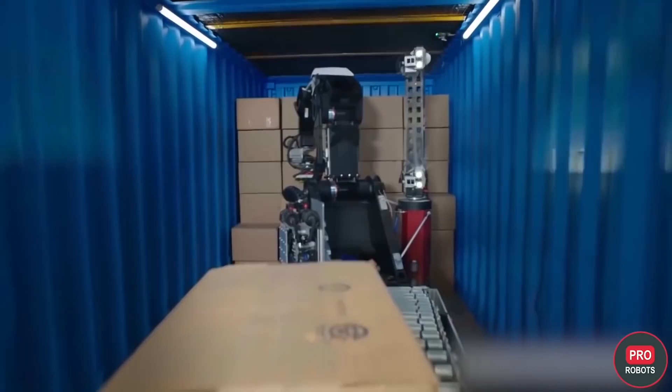The robot's smart grip recognizes and works with all types of packages without delay, thanks to built-in monitoring and active controls. The mobile base of Stretch is very compact and allows the robot to drive itself into the unloading truck. The robot can run on high-capacity batteries or on mains power. The company positions Stretch as a fast and smart robot that is easy to deploy in any warehouse.

Japanese company Man-Machine Synergy Effectors showed a huge humanoid teleoperated robot. The operator in the VR booth controls the robot's arms, not only by directly copying the movements of a real human, but through a system of levers. A VR helmet transmits stereoscopic images to the operator from 2 cameras on the robot's head, and also reads head movements and transfers them to the robot in real time. But the best part is that there are pedals on the booth, but they're not working yet. However, apparently in the future, the company will add functioning legs to the robot.

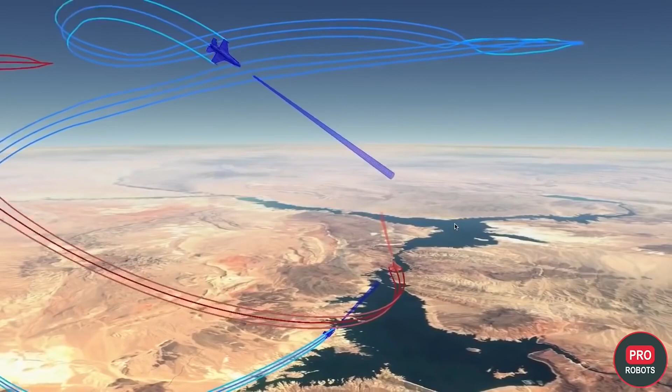The U.S. Advanced Research Agency DARPA continues to develop its program to control combat aircraft with artificial intelligence. Physical flight tests are expected to begin this year.

The U.S. is closely investigating 2 accidents involving Tesla. In the first, a Tesla Model Y crashed at high speed under a semi-trailer in Detroit. Thankfully, no one was killed, and the car was being operated by a human. The second accident happened when the car was being driven in autopilot, at least that's what the driver is claiming. The Tesla crashed into a traffic police car standing at the edge of the road, and again no one was hurt.

Tesla is unlikely to be held liable, since the rules require the driver to be in control even when autopilot is engaged. However, the scrutiny of these accidents by authorities may suggest that new US President Joe Biden's team could reconsider regulatory practices regarding intelligent driver assistance.

The Chinese company Ehang intends to create a vertiport in Italy whose design is inspired by a baobab tree. Passengers will ascend to the upper platform of the 30-meter tower, made of steel and laminated wood, by means of an elevator. Immediately below the terrace there will be a waiting room and panoramic square restaurant. There are plans to install photovoltaic panels in the tower to generate more than 300 kilowatts of energy per day, some of which will go to charge the company's electric flying cabs.

The British will try to cause rain in the Arab Emirates by using drones with ionizing units on board. Low-power electric charges could cause larger water vapor droplets to form. The technology will be tested in Dubai in the near future.

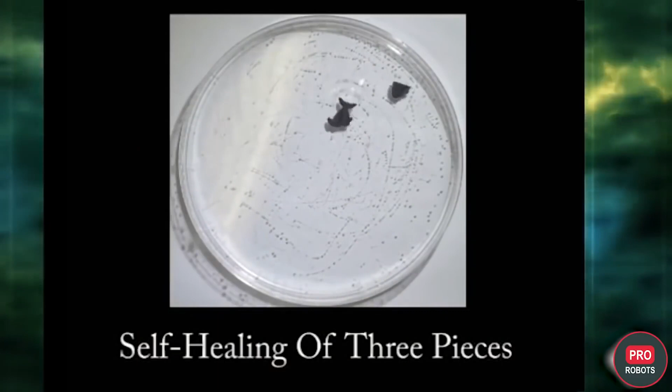Engineers at the Stanford University Robotics and Artificial Intelligence Laboratory taught their robot Risen to manipulate objects of variable shape with different surfaces. They succeeded by developing hybrid electrostatic grip pads inspired by geckos. The research is aimed at creating robots for retail applications.

The candy company Mars Incorporated has created a robot nicknamed Smiley Face that chases customers around the store and obsessively suggests that they buy more candy. The robot is currently being tested at a store in New York City. Interestingly, the robot is not just trying to sell candy, but also collects data on how customers move around the store and interact with specific products.

SpaceX has assembled the first stage of a Super Heavy launch vehicle for Starship, which was named Super Heavy. According to Elon Musk, the work is not yet finished, but it will be necessary to weld together a tank of liquid oxygen and methane.

The first prototype of Super Heavy BN1 will have a height of about 67 meters from the top to the end of the nozzles of the Raptor engines. Starship and Super Heavy together will be 120 meters high. SpaceX hopes to be able to begin orbital launches of Starship as early as July of 2021.

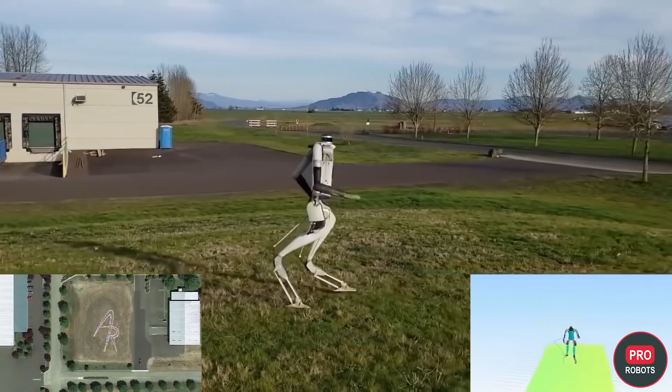Agility Robotics showed how the Digit robot moves using GPS navigation along waypoints, detecting distant obstacles using LiDAR. The robot maps the terrain using stereo cameras and balances its movement in real time.

Anybotics and BASF, a major chemical manufacturer, talked about the effectiveness of the Anymal four-legged robot in a new video. The company's chemical complex is located on an area of 10 square kilometers and is constantly growing and developing. This mobile robot has solved the problem of precise mapping of the enterprise, regular inspections, and data collection.

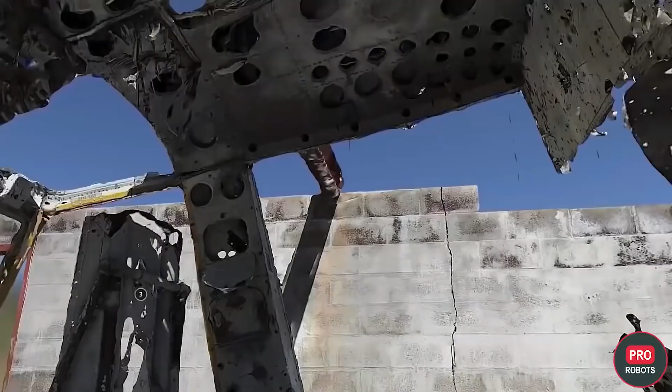Skydio showed off the results of an early test of its 3D Scan Sneak Peek software. It is the first adaptive scanning software of its kind, based on Skydio autonomy. 3D Scan automates the acquisition of any terrain with full coverage and ultra-high resolution. It requires minimal pilot training.

On May 1st, an experimental Dawn version of the Beta Robot Cafe will open in Tokyo. The idea of the institution is that all the robots in the establishment will be controlled from home by people with disabilities. The initiative aims to help such people not only earn an income, but also communicate with other people while continuing to be members of society.

Fanuc will create the world's largest industrial robot manufacturing center in China. This is how the Japanese company will compete for market share in the country, as China is currently experiencing a robotization boom. The investment in the project will amount to $240 million.

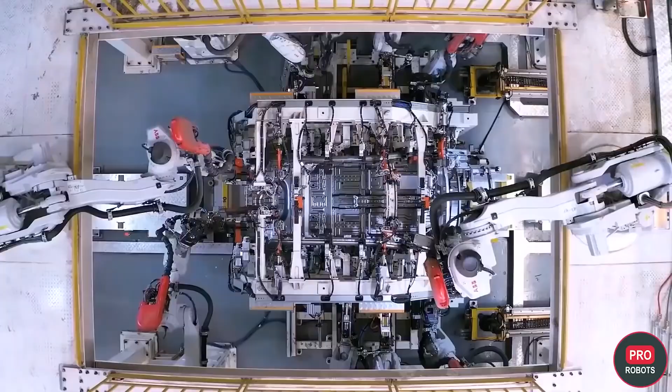Fanuc's competitors in the race for the Chinese market will be Japan's Yaskawa, which is already building a similar $50 million factory, and ABB of Switzerland, which plans to invest about $150 million in its Shanghai plant. At the same time, the Chinese government is preparing a plan to promote domestic technologies. Beijing intends to increase the share of local players in the domestic market to 40%.

The Center for Tactile Internet with Human in the Loop has published an intriguing video which demonstrates control of the Boston Dynamics robot Spot using an interactive glove. There's no current explanation in the video's description, so we're awaiting official news, but as of now, the idea sounds promising.

In a previous episode, we told you how Spot the robot helped the police and scared the locals. However, it turned out that they were not the only ones who were scared. Now the city wants to introduce restrictions and bans on the use of armed robots by police officers. At the same time, the public fears that even an unarmed Digidog can easily become deadly.

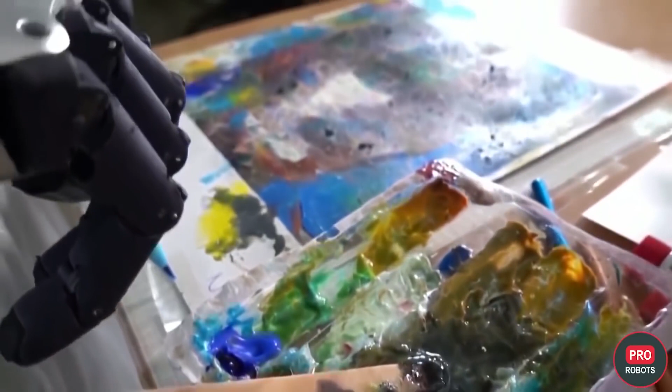Note that NFTs, or non-fungible tokens, became popular in 2021. For example, in February of 2021, a Nyan Cat GIF sold for $590,000.